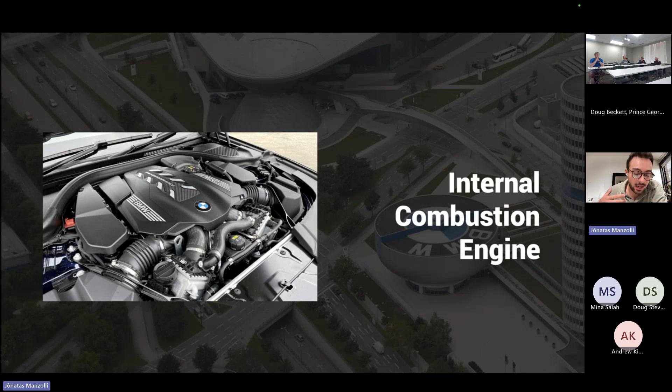So as I said, I did a double degree in Germany, and when I was living there, I was an intern for a company that probably you know, that's BMW. Ironically, I was working with internal combustion engines at that time, on the internal combustion engine team. One day, one of my colleagues, we were having lunch together, and he approached me and asked if I knew Tesla, if I ever heard about Tesla. I said, yes, of course, Tesla, it's a really famous scientist, he did brilliant things, an amazing scientist. Then the guy started to laugh at me, and said, I'm not talking about this Tesla, I'm talking about a new car manufacturer that's starting operations in the US. This was around 8 years ago, more or less.

And it's funny because although the story is funny by itself, it's funny because today, if you ask someone in the street what Tesla is, probably they're gonna say it's a car manufacturer and forget about the scientist. This is because we are really facing a change of paradigm. Maybe 8, 10 years ago, electric vehicles were kind of sci-fi, a technology that we didn't know if it was going to be something in the future, but today we can definitely say that electrification is coming and is coming to stay. It's just a matter of the pace that this transition is gonna reach, but definitely it's gonna happen, and it's already happening. This is happening mainly because of three pillars: first, we are seeking more sustainable transportation, more efficient transportation means, and also carbon-free technologies. Of course, the decarbonization of different economic sectors is mandatory, and we are really seeking those carbon-free technologies.

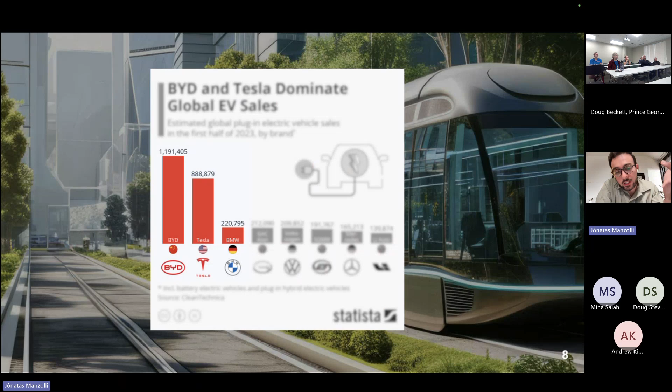When we look at the key players, there are different companies, but two main giants disputing the market right now: Tesla, as I said before, and BYD, which in terms of sales is still the biggest one in the world. BMW is lagging behind. There's a big gap between the two first companies leading the market and the third one.

Another interesting thing to highlight: at least in Europe—while in North America, in the US mainly, we're seeing a change in the political landscape—Europe is really focused on decarbonization of transportation. There's legislation in the EU to ban any new petrol and diesel cars from 2035. This is a changing paradigm, because it's not only about transitioning but also banning all other technologies that are not carbon free.

This is going to change a lot in the landscape, because it will also be mandatory to have EVs or other carbon-free, zero-emission vehicles in Europe by 2035. And if we put that in perspective, 2035 is around the corner.

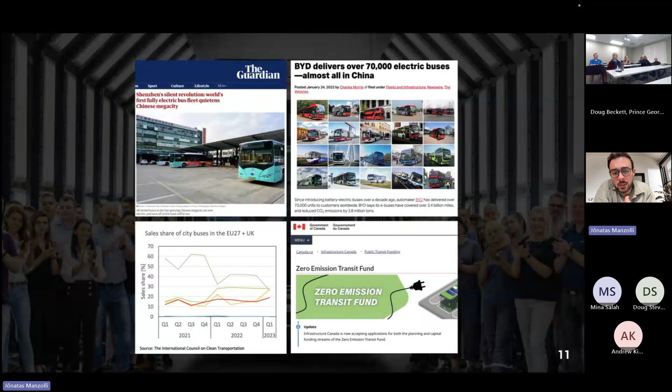I also want to highlight electric buses and transit, since this is my main area of research. To give an idea of where the market is and how it's evolving: China is leading by far. Looking at market share worldwide, China holds around 85 to 90% of the electric bus fleet in the world—they almost have a monopoly there.

I always like to bring up the example of Shenzhen, home of BYD. They have a fleet of 16,000 electric buses and 22,000 taxis there that are all electric—a massive fleet of electric vehicles.

Also looking at BYD, they are delivering electric buses all over the world, and they've already reached more than 70 thousand in the entire world, which is amazing to think about.

An interesting aspect is that in Europe we're already seeing a shift in market share. In the first quarter of 2023, for the first time, sales of electric and hybrid vehicles were higher than diesel. When we sum electric and hybrid sales, they're more than double diesel sales—pointing to this massive paradigm change and transition happening in Europe.

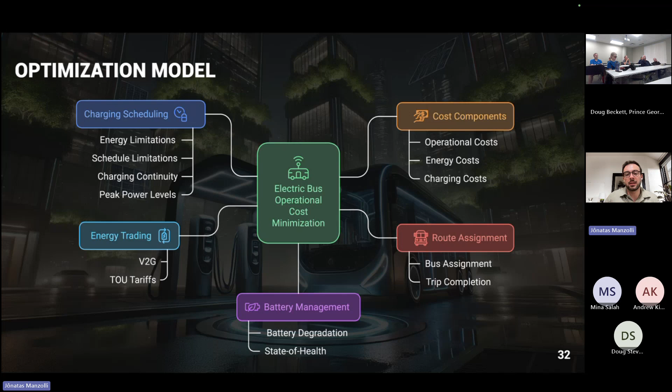We also need to consider the route assignment of the fleet, so we have an assessment of the routes, and with this we can try to assign the vehicles to each route to minimize the energy consumption of the vehicles. We also have an assessment of different cost components on the operational costs, energy costs, and charging costs. Basically those are all the features encapsulated inside our optimization model.

And then, breaking it down a bit more in terms of inputs — what we need to make this work is information about our fleet, so the number of vehicles, the capacity of the vehicles, the chemistry, and information about the routes.

So how many routes do we have? What's the time schedule of the routes, etc. Information about the charge infrastructure - how many chargers do we have? What are the limitations of the grid capacity, and also grid characteristics, which are also needed.

In terms of the optimization, which is the second part where the magic happens, we consider different constraints: grid and tariff constraint, routes and schedule, energy and power.

And then we also have, as I said before, the modules. So a module for the energy consumption uncertainty, and one module for the battery degradation.

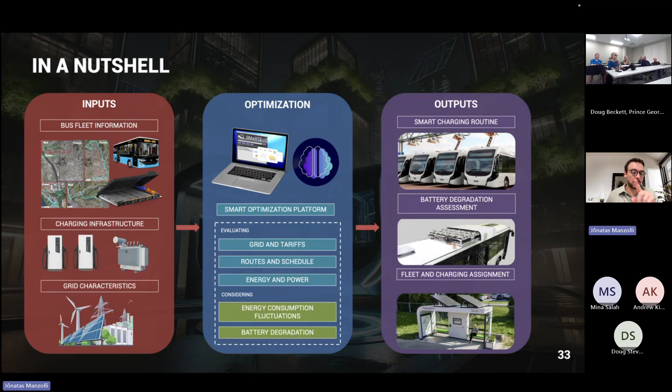With all of this information, we can have some interesting outputs: we can build a smart charging routine for the fleet operators, assessment of the battery degradation due to the charging event, and also we can assign the fleet to the routes based on all the calculations that we do in this platform.

Moving forward, I just want to present really quickly the simulation tool that we developed, and also the battery degradation model that we developed.

The simulation approach was basically an agent-based approach. An agent-based approach means we have different entities in a simulated environment, and those entities work as a kind of standalone agent. They have different tasks in the simulated environment, and in this case, all those agents have their transit tasks.

With this, we can extract the information of those agents, which in this case are the buses, and we can get a speed profile of those buses.

Then, based on the speed profile, we built an energy consumption model using Python, a programming language. And then we can feed our optimizer with this estimation of the energy consumption based on the simulation that we have done.

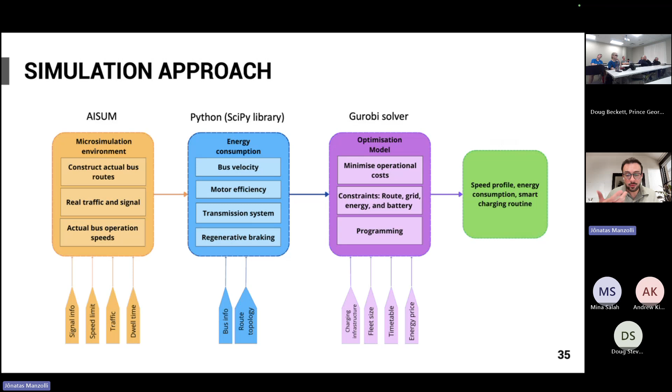With this, we can have a more accurate energy consumption, and also optimization of the vehicles based on a more accurate energy consumption behavior that comes from the simulation that we have built.

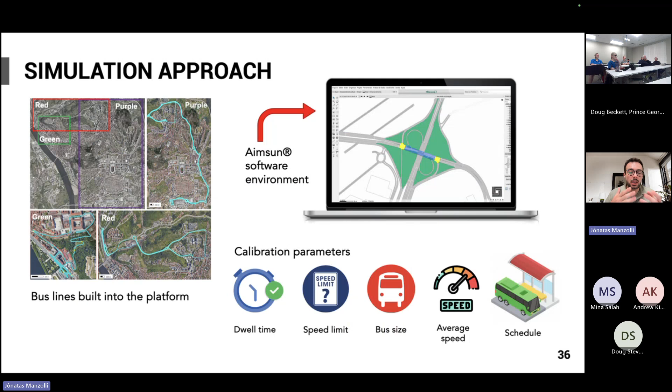Our simulation approach was developed inside the Aimsun software environment, and we have developed different calibration parameters for the fleet. We consider the dwell time, speed limit, bus size, average speed, and also the schedule of the fleet.

For this module, we also consider different scenarios using different operation strategies. Business as usual, where the vehicles and buses share the same lanes.

A signal priority strategy, where the buses can always have priority on the signals, so it's always kind of green for them. This also impacts the energy consumption.

A third scenario where the vehicles have dedicated lanes plus signal priority, so they are almost always running - it's almost a BRT style operation. The idea here is also to see how this would impact the energy consumption.

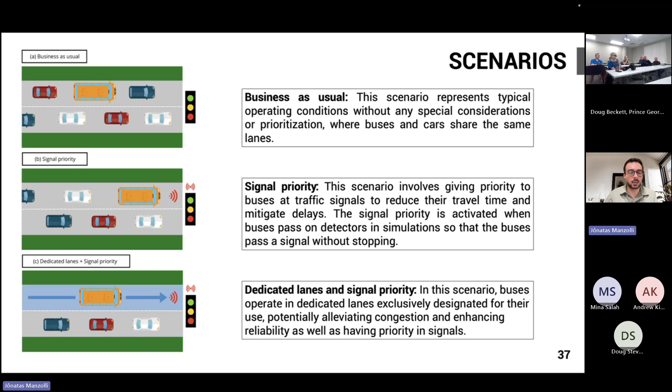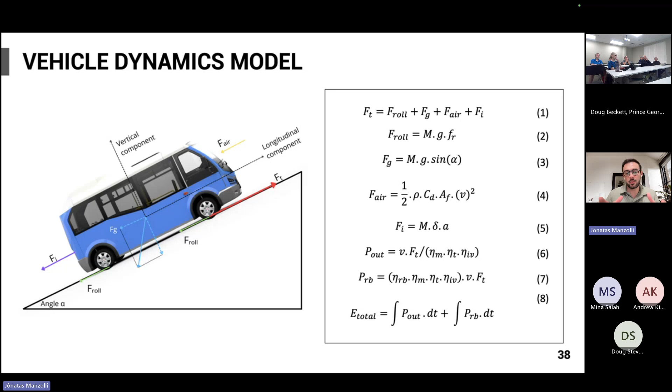To simulate or assess the energy consumption, we used a physics dynamics model - probably you remember your physics classes seeing this figure. Basically, we built this using the speed profiles to feed these physics models, and then we got some results from this.

What's interesting to highlight here is that the results showed that using those techniques with signal priority and dedicated lanes, the vehicles consume less energy and operate in a more optimal way, although they do not recover much energy from the braking, the regenerative braking process. But it was an interesting study that we have done.

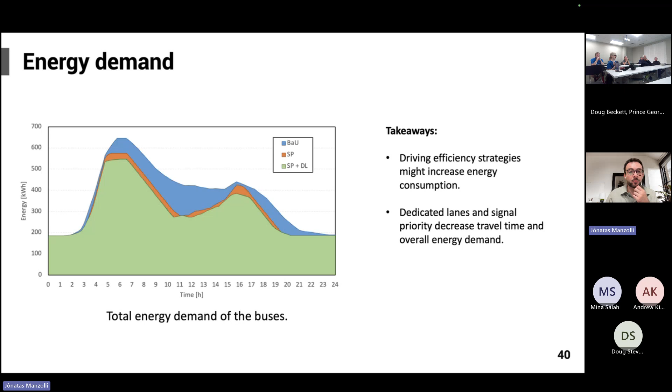Moving to the third model that we developed, which is the semi-empirical battery degradation model, here we try to assess what would be the degradation of the battery based on two different levels.

In our optimization model, we estimate the degradation costs of the vehicles based on a throughput model with an ampere-hour throughput model. This modeling approach basically considers that until a battery reaches the end of life, it's going to cycle a certain amount of energy. So every battery has an estimated energy amount to be cycled into the end of life.

With this, we know that for each cycle of each charging event, we are degrading the battery by X amount. We can get this insight - how much percentage we are degrading our battery every time we charge it. This is the first level that we have used, and this is what we're using in our optimization model. But then we need to have an idea of how we're going to estimate this amount of energy that is going to be cycled to the end of life.

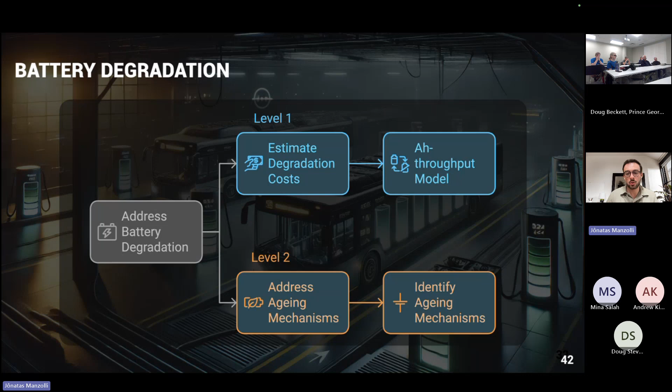So to do that, we have a second level assessment in our models. We developed an aging mechanism in the laboratory, so we identified different aging mechanisms.

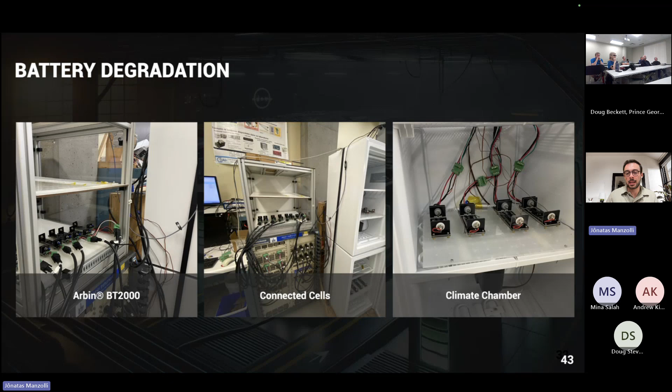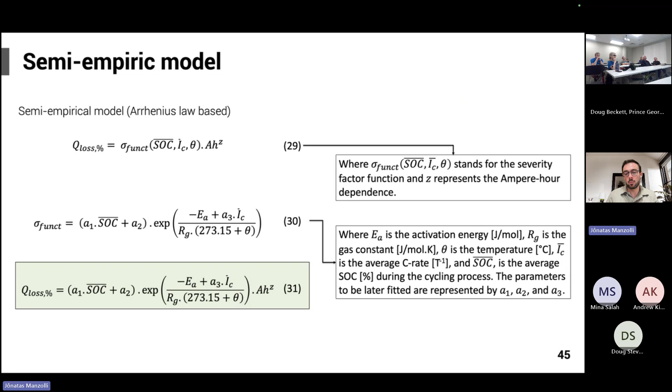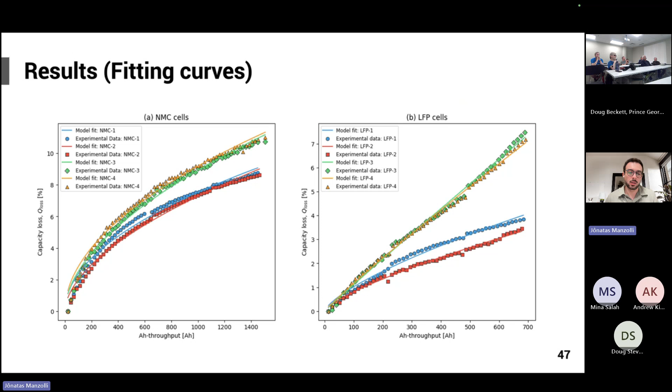With this, we could extrapolate what would be the energy throughput of the battery at the end of life, based on the models we developed. We also considered different temperatures and driving behaviors, to have a more accurate estimation of different battery capacities over time. Here you can see the final results, how we could extrapolate the energy throughput over time.

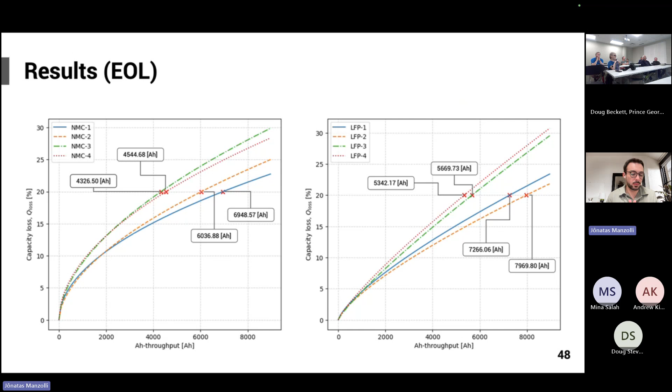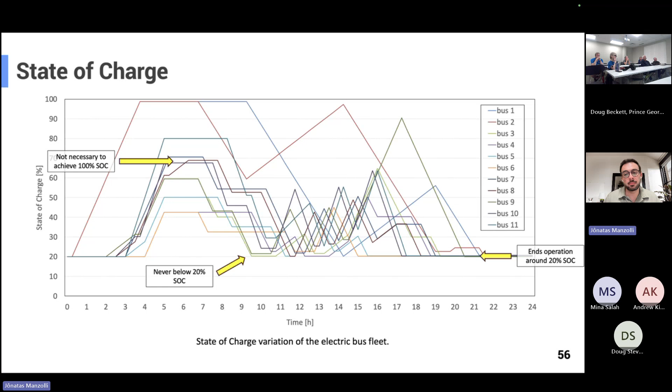Here we can observe the behavior of the charging events during the day. The only thing I want to stress is, first, we don't necessarily need to charge all vehicles 100% to have daily operation. Also, we guarantee the fleet never runs below 20% during the operation day, which is important to keep the state of health of the battery in good shape, never breaching below 20%.

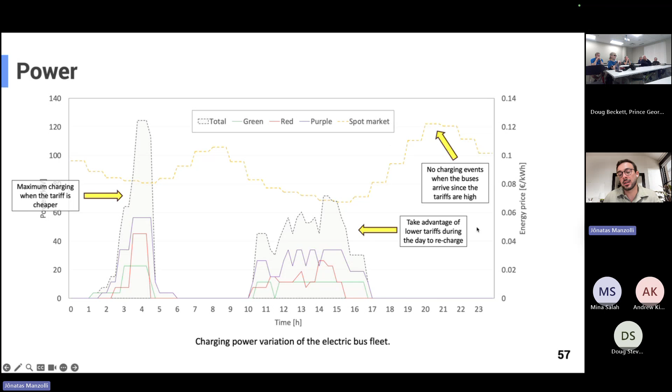Another interesting thing is there are no charging events when the vehicles arrive at the depot, which is kind of counterintuitive, or not what operators typically do, because in this specific example the tariffs are much higher when vehicles are arriving at the depot. So if an operator just plugs in the vehicles when they arrive, they will have a much larger cost. This is not ideal in terms of reducing operational costs for this example.

The second case study is also a smaller fleet, but with bigger buses that they already have in Coimbra, Portugal: 10 electric BYD buses with 348 kilowatt hour capacity, and the chargers are 10 units at 100 kilowatt. The trips are 420 round trips across 10 different routes.

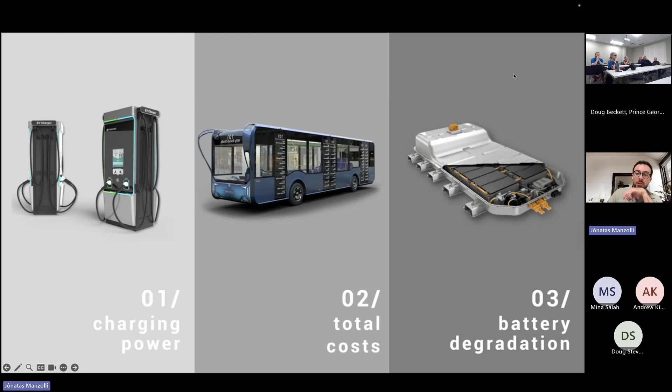Now I'm going to show you the results. We also simulated different scenarios and had the chance to go over different scenarios with this fleet, but I'm not going to stress the details right now. What I want to present and highlight is the results we got with this fleet. First of all, in terms of charging power, it could reduce the charging power peak by 60% by controlling the charging events.

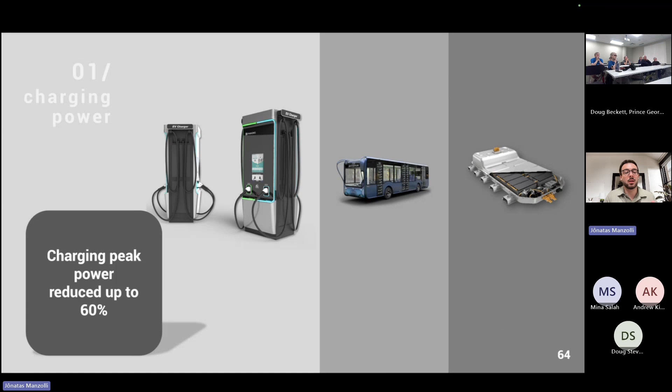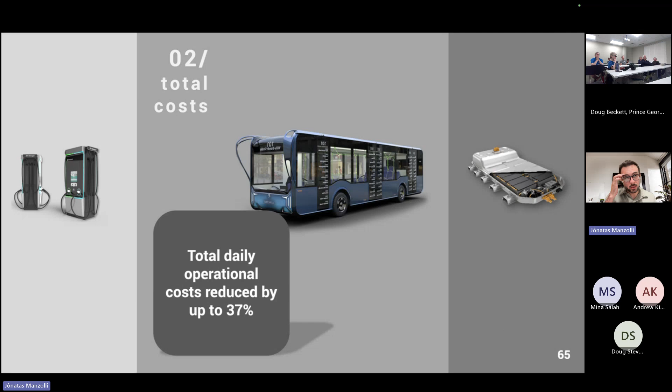So later, using all the vehicles and charging them at the same time with the solution we proposed, they could reduce this charging peak by 60%. The daily total operational cost was reduced by 37%, which is a good aspect for cheaper operation. We estimate that using this smart charging approach, they could increase the battery lifespan by 4 years, because they're going to have fewer cycles per day on the energy level, which is also interesting for keeping the fleet operating longer.

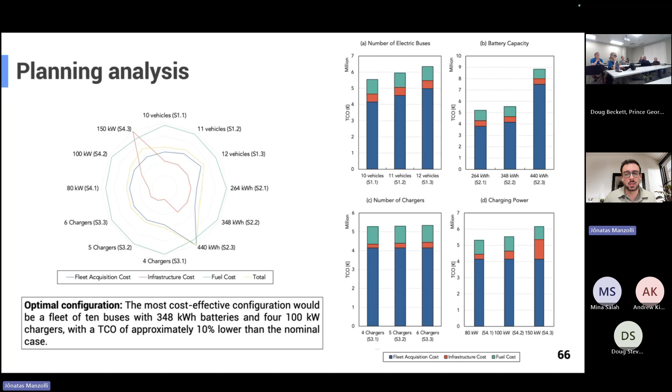Here's an idea also in the planning analysis. We also used the tools we developed to play with different scenarios, sensitivity analysis, different fleet characteristics, charging power, fleet sizes, and battery sizes. So we can also use the solution to do that.

As I said, we kind of built a platform on this, and later we can also go into detail on that if you're interested. You have a website where you can also get all the information.

And just to finalize, I want to give you some future perspectives, which I believe is where the research should go, and aspects that could be interesting to look at in the future.

The first one is fleet replacement, in the sense that we are going to have a lot of operators dealing with mixed fleets—diesel, electric, and hybrid at the same time. So having research to know better how to operate those mixed fleets, where we should put electric vehicles, where we should use diesel, how we're going to replace diesel in a more optimal way. Having this idea of replacement or transition that we're living right now is a really interesting aspect to be assessed right now.

Autonomous vehicles and autonomous buses—I believe that's also a really interesting aspect we should be looking at in the future. Today in our lab, we are really looking forward to autonomous vehicles. We have some collaborations with Luxembourg in Europe to develop research on this, and maybe we can talk about this later.